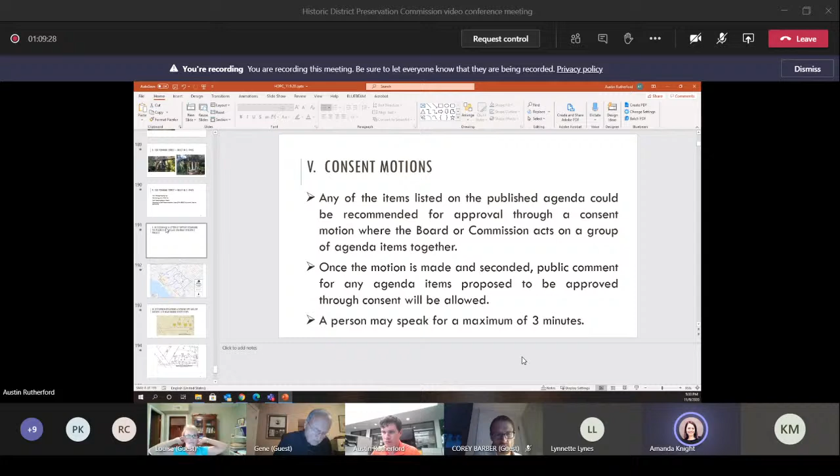Can you hear me? I just want to thank you for the opportunity to come to you and ask for a letter of support for a grant we are submitting through FEMA's non-disaster hazard mitigation program. There are two specific programs we're applying for for this particular project: the Flood Mitigation Assistance grant, and the Building Resilient Infrastructure and Communities grant.

These are applications to implement flood mitigation for Royal Avenue and Edwards Park Basin. As I'm sure you're familiar, that is a $12.8 million project for which we will be requesting up to a 75% match from FEMA. For the discussion with the Historic District Preservation Commission, I think this will be a very good indicator of us aligning goals in protecting and mitigating flooding for so many historic buildings in the Old Village. I have drafted a letter of support for the board and sent that over to Austin. If you have no questions, I'll end my brief.

Ms. Knight, I have a question. This is Louisa Montgomery. As I understand it, that is the Julian Weston Park, not the Edwards Park. It's not a particular park, it is the Edwards Park Basin. So those are two flood basins, Royal Avenue Basin and Edwards Park Basin. As I understand it, but the name of the park is Julian Weston Park, not Edwards.

All right, we're gonna go back to item 6. Item number 6A is 301 Center Street. Applicant seeking final approval for enclosing a portion of the front porch. Applicable ordinances are porch percentage, applicable design guidelines are doors and windows, number 3 and number 9.

Moving to staff comments, the enclosing of a portion of the front porch reduces the percentage from 17.5 to a still-conforming 14%. It should be noted that the neighbor property directly across the street had a similar enclosure about 2 years ago, also reducing their porch percentage to 14%. Staff recommendation is based on this and the design of a previous porch enclosure on the rear.

Staff recommendation notes the property across the street that includes a similar front porch enclosure. Here we go to the floor plan.

The applicant is ready. We are ready. David, you have 10 minutes. It shouldn't take that long.

I'm David McCall, architect, here with Paula Kessler. Paula wanted to do an addition to the house to increase the use and function of the kitchen with a butler's pantry. We stayed within the footprint of the existing structure. It is a non-historic building, built in 2009, and we stayed within the footprint. So we seek your approval. If you have any questions, I'd be happy to answer.

Are we ready for a motion of approval? We need to have public comment and the report first, and then the board can ask some questions if they so choose.

Is there any public comment? For those of you that may be tuning in on YouTube, if you call this number, I have available, and then the conference ID, you can ask questions. We'll give you a minute to call in.

I did just allow an anonymous caller in. I'm not sure if you wanted to speak on this item. If you are wanting to speak, just give your name and address, and you'll have 3 minutes. You may unmute yourself by hitting star 6. Yes, they have no comment, and there's no one else waiting in the lobby. Let's give another 15 seconds just to make sure.

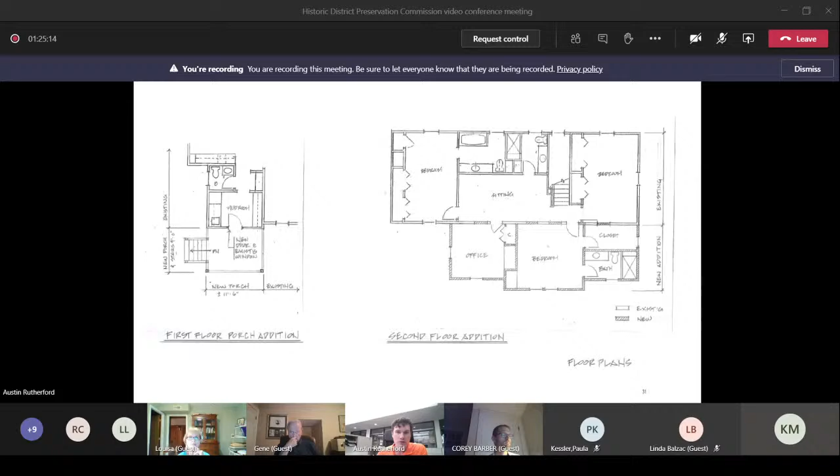Let me get to the site front stoop, so you'll see right here. That concludes the staff report. Linda, if you're ready, you can have your 10 minutes. Linda, you may need to take yourself off mute.

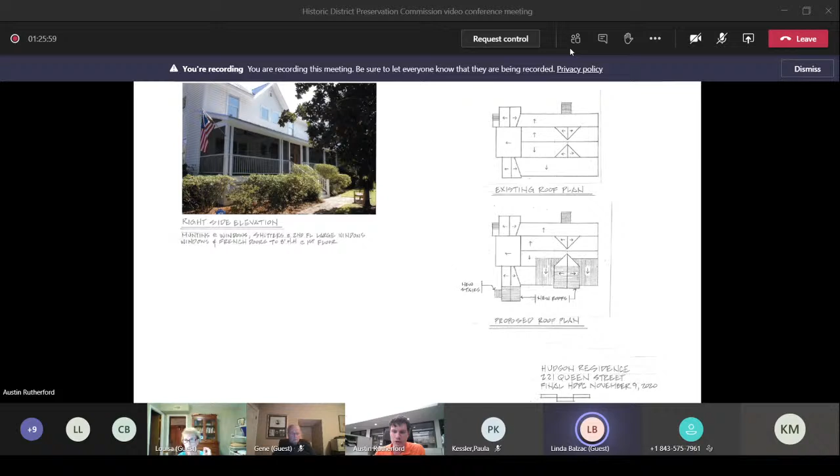Can you hear me now? Linda, we're getting some major feedback on yours. You want to try calling in, Linda? Let me bring up the code for you. Linda, you might want to try calling in, because we're getting some major feedback on your end. Give her a second.

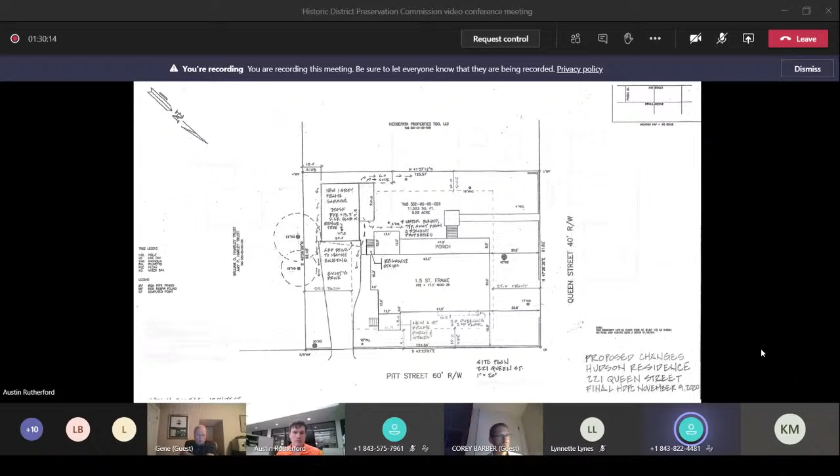If you have any questions... Just wanted to know, wait, I had to walk away from the computer. Here's the porch, and okay, I'm going to turn my mute button off for a second. No, I'm not, you just go ahead. Can you hear me? I don't want to wait for you. I can hear you, good.

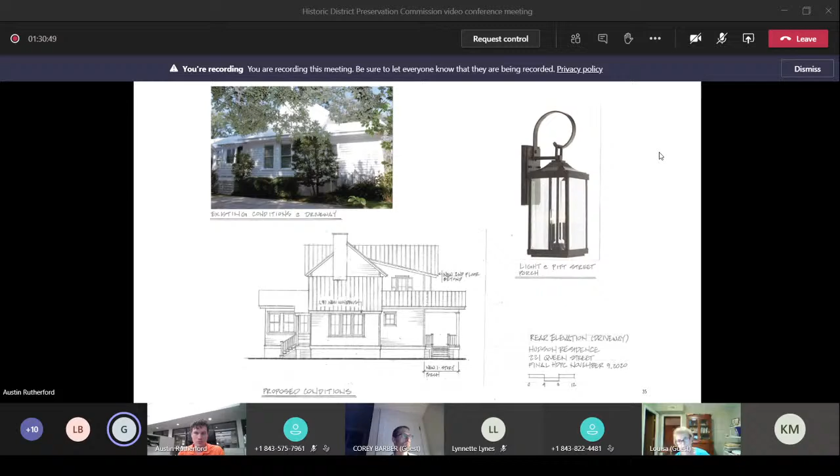Linda, this is Louisa. I think you've done an excellent job. The house needed some freshening up to bring it more into the flavor of the village. I'd be more than willing to give you that allowance, as it's not needed to do more than freshen it necessary. I think that is most necessary, and I'm definitely in favor of allowing that.

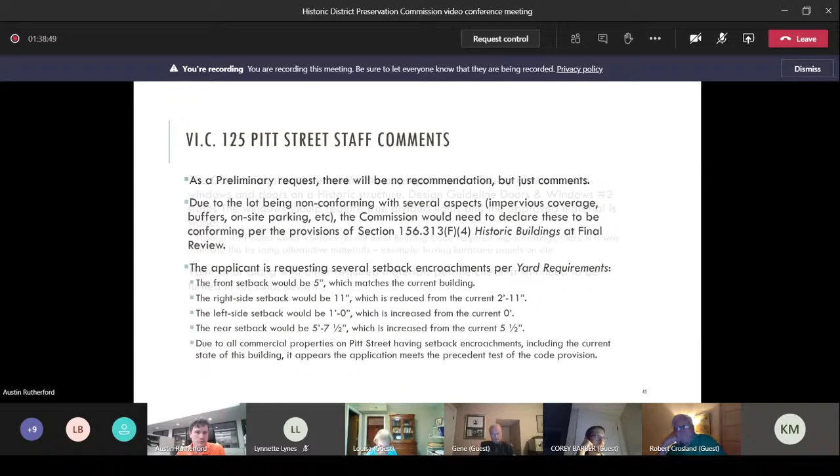The commission should determine the appropriateness of using aluminum clad windows and doors on a historic structure. The design guideline for doors and windows number 2 states windows should feature true divided lights, and the approved material is wood. Staff notes wood windows do not meet the building code requirements for impact ratings. There is a way around this using alternative materials in the building code - an example is having hurricane panels on site, sometimes just plywood on site, as you routinely see downtown. Paint color, along with other required materials per the checklist, will need to be turned in for final review, so just note that for the applicant. Again, there is no recommendation since we are in preliminary comment.

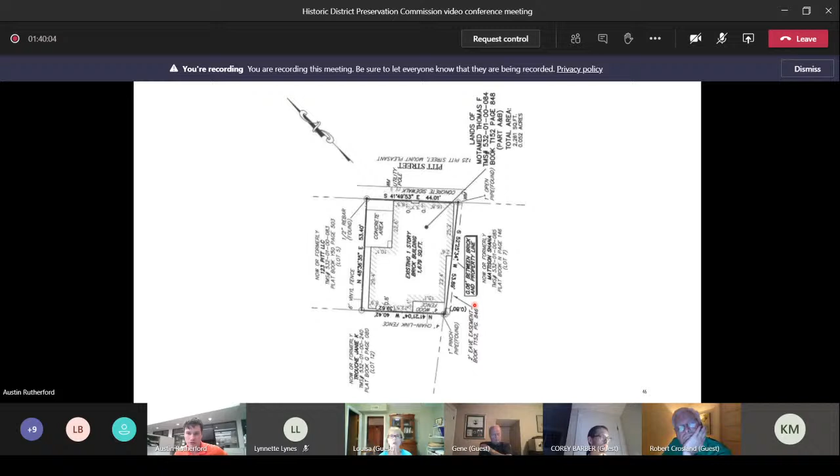Moving into the actual application, this is the survey of the site as it exists now. You'll note that if you step out the rear door, which it does have, you're actually on the neighbor's property in the rear. And the eaves go over on 2 sides, and maybe the third over here, actually go over the property line. That's just the way the additions were done back in the day.

Here you have the current site. This is the original structure, the original 1895 structure. And then these are sporadic additions that occurred at many different points over the years. Having been in this structure many times over the past couple years, as the owner was trying to figure out what to do, the additions especially are in very bad shape structurally and not structurally sound.

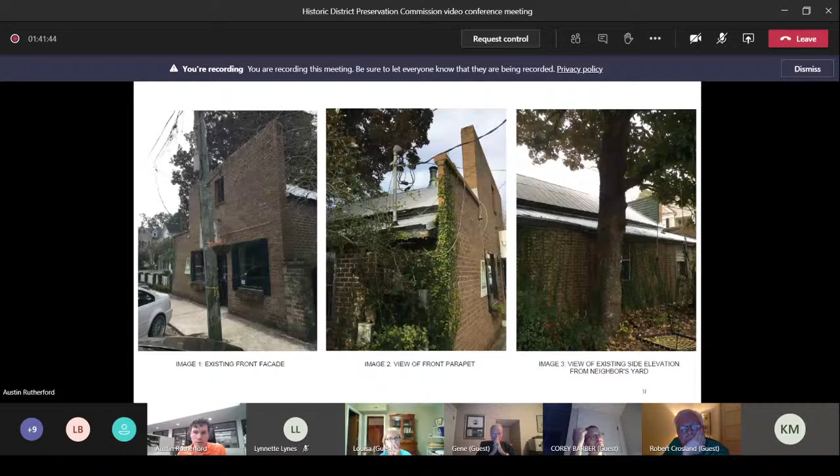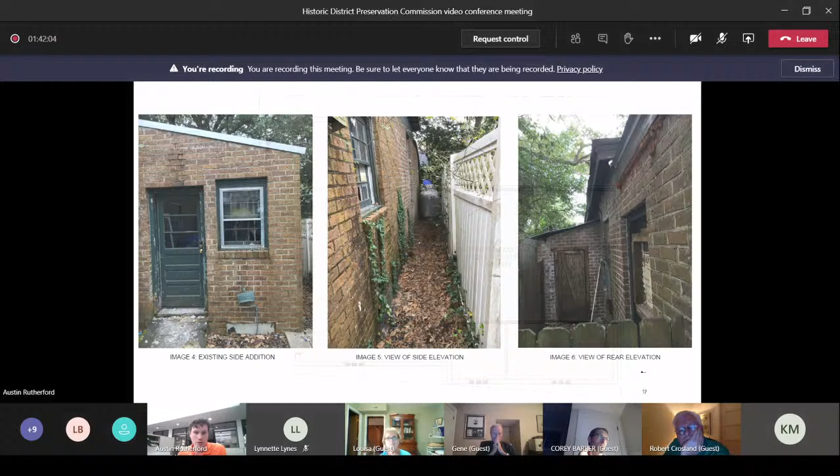These pictures really don't do justice, having been inside it. The original footprint is pretty good for the most part, especially the base flooring and some of the roof members. However, the more you get in towards the non-historic additions, it looks like they picked up pieces of wood off of other construction projects and tried to piece together stuff, like what was pretty common back in the day. So these are the non-historic additions in the rear.

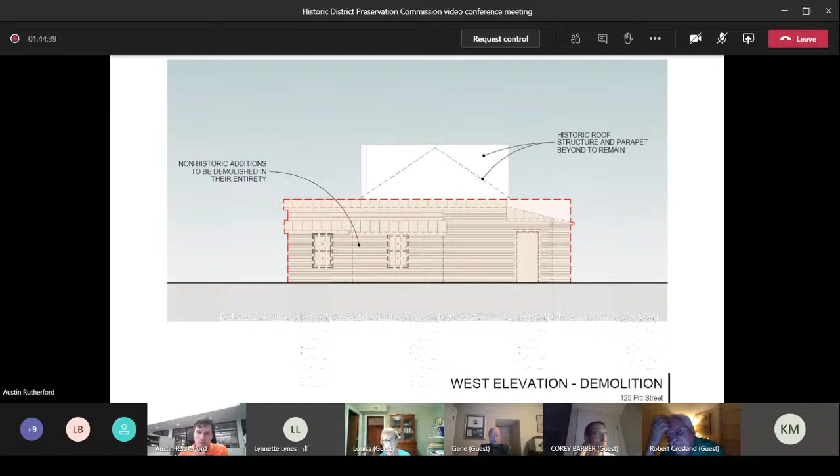So increasing the flood height is not required.

Excuse me. Just a second, sorry. We're having the cleaning crew come in, so let me just switch to the headphones.

Can you hear me? Yeah, okay. So moving to the next elevation, this from the south, and you can see what the south elevation would be here. And going into the 3D renderings.

And then to the artistic rendering. And that concludes the staff report.

If Chris, are you ready for your presentation? I'm here, yeah. You have 10 minutes. Okay, thank you. My name is Chris Altman, I'm with SMHA Architects. And, you stole all my thunder. If you could maybe go back to the new floor plan, I can explain a little bit of some of the questions that were being asked. That might be the easiest thing to do.

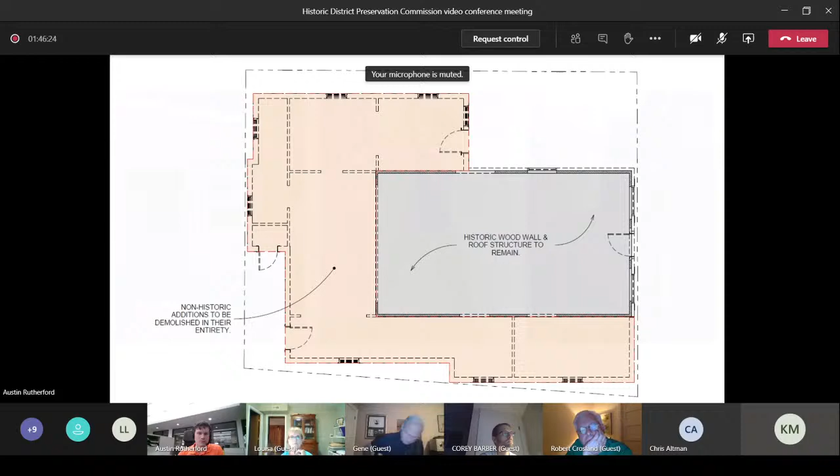Maybe one more to the... nope. Okay, outline. Keep going. That one's good, okay. Next one. Oh, sorry, okay. No, the other direction, sorry. Oh, okay, sorry.

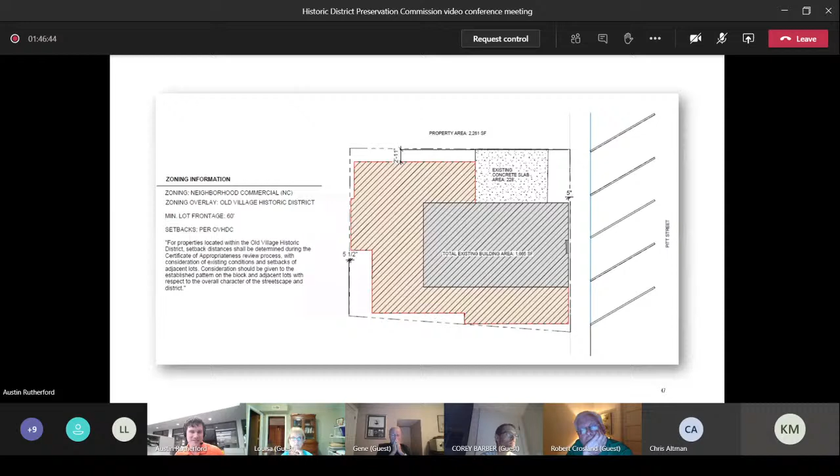There you go. As Austin was mentioning, we are proposing to move it, and as he mentioned, it's to get it off of that property line to the south, allowing us to provide some space for the geometry of the building, to correct some of those ad hoc and hodgepodge additions that were done over the years.

We're actually having to lift that existing center portion anyway because there is no real foundation under this building. It literally is 2x material sitting on dirt, and it's not something we could continue to do moving forward. So it provided us an opportunity to go ahead and correct that situation. It wasn't something we set out to do, but as we got into it further, we realized it would greatly improve the situation all around.

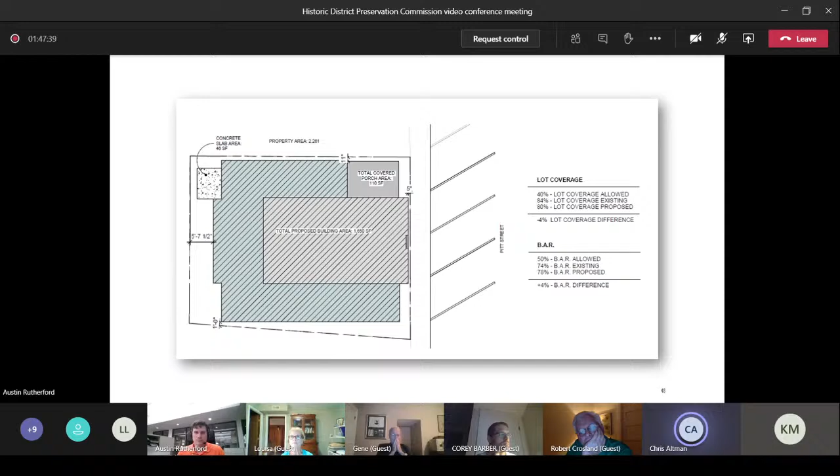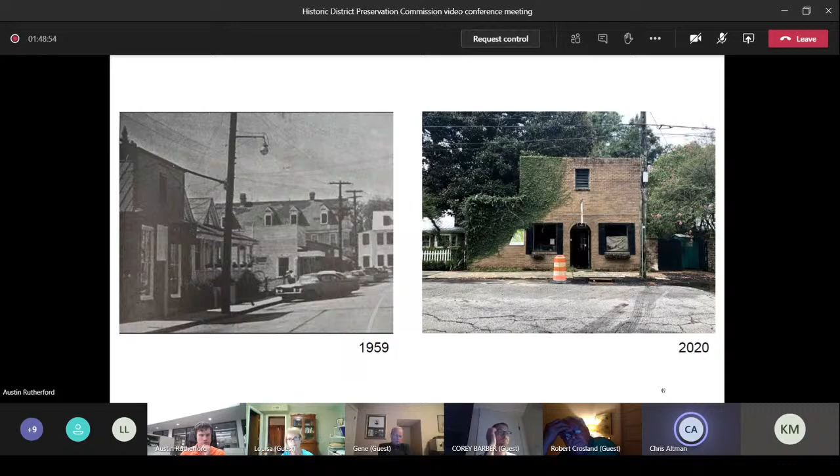Okay, Austin, if you want to shift to the elevations. You can stop there, that's good.

As Austin mentioned, we are proposing to use an aluminum clad window here. I would argue that if this was a residence, I would 100% support the idea of true divided light and wood windows, but this isn't a residence, this is a commercial building. Providing a more durable system - what we call a passive system - requiring nobody to put panels up or remove them, or have ugly fasteners on the buildings to accept them, we think this is a much better solution and would be more in keeping with the aesthetic of the neighborhood and the commercial area.

As you mentioned before, we're basically bringing this all back to what the 1959 image showed. If you want to go to the next picture.

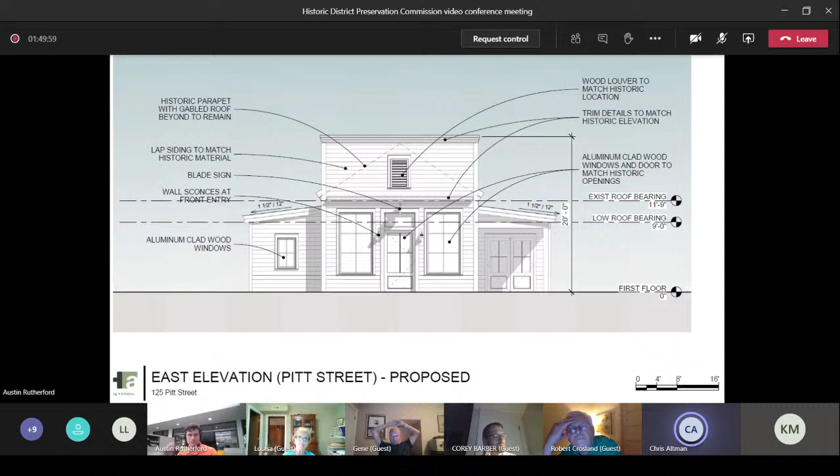That large window in the bottom left-hand corner underneath the covered area was original to the building, so we're maintaining that. What you're not seeing on these two side elevations is other windows, and that's because we're so close to the property line we can't provide windows for code. So that's really one of the main reasons we're proposing those shed dormers on the roof, just to allow some more light into that space, since we don't gain it from windows on the side.

We were really in support of the idea that staff came up with, that roof divider between the existing roof and the new roof, to always have a visual benchmark of where those two spaces stop and start. Next, Austin.

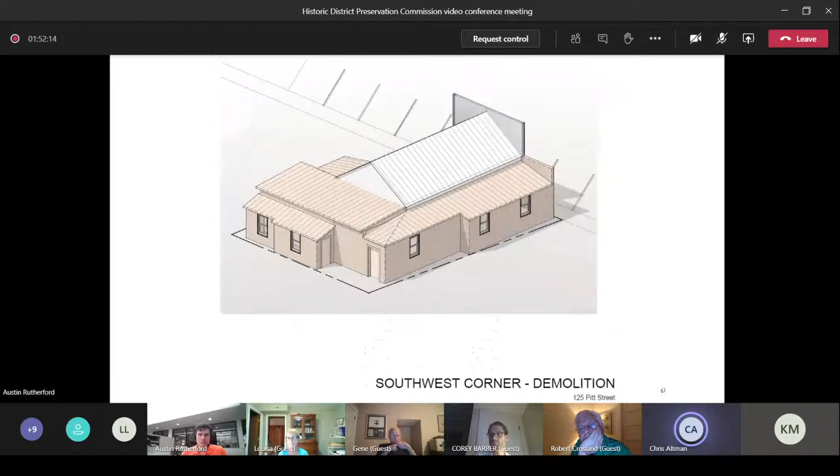That's good, Austin. Okay. It's beautiful. Thank you. We're trying.

I remember it before it was bricked up. It didn't look too good. I remember before it had brick on it, and it was a mess back then. I wish they had never put that brick on. It's literally against the siding, and it has contributed so much to the deterioration of this building. It's really a sad thing. It caused all the rot. Yeah, but we're going to fix it.

Good. Thank you. This rendering, we haven't finalized colors, but I think we're all leaning towards the sort of white, off-white that plays along with everything else that's in the old village, especially the commercial area.

I didn't mention earlier, but I'll mention now, and the color's a little off here, but we're actually proposing to do a zinc roof on this building, which is in keeping with copper or terne roofs. It's a 100-year roof, and I applaud the owner for wanting to do that so that for sure this building will last another 100 years. That's a classic, high quality roof to put on this building.

But back to the colors, again, whatever we choose and submit to you guys will of course come from the Charleston Historic Color collection that is required for the zoning ordinance, so we'll be sticking with that color group. And I'll open up any questions you might have.

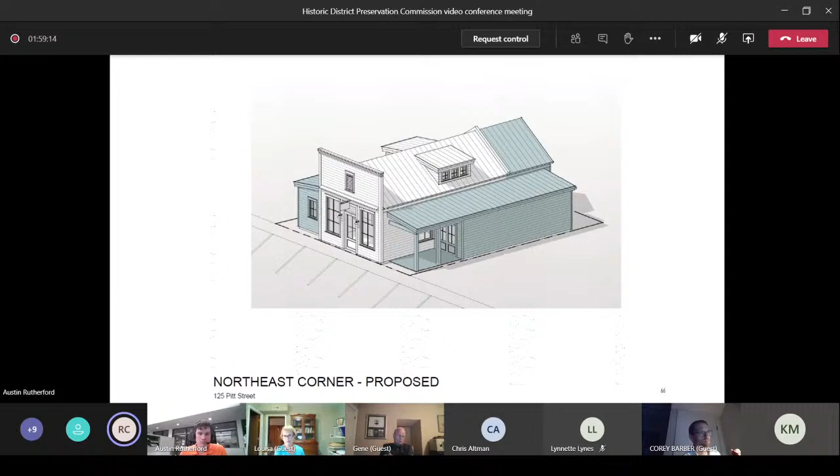We're not discussing design, are we? We're just discussing what are we working on particularly? You're providing comments to the applicant, which do involve design, so that they know what they should address for final review whenever they decide to come back.

Okay, well the siding in the original building, would that be 1 by 8s, 1 by 10s? I'm not sure you can exactly tell via that picture. Maybe, Chris, you can scale it correctly via that picture, get a best estimate. Once we get the brick off, I think there's some of the siding still there, so we should be able to measure that siding and basically replicate it on the historic section. That's what I was thinking. Yeah, underneath the brick, once we get the brick off.

Austin, can new brick be painted? Yes, new brick can be. So you could have a white painted brick that would clearly differentiate and not be so in your face different. But I don't know, side additions. And you're also going to have a maintenance issue with zero lot setbacks. I don't know how you're going to paint lap siding every few years.

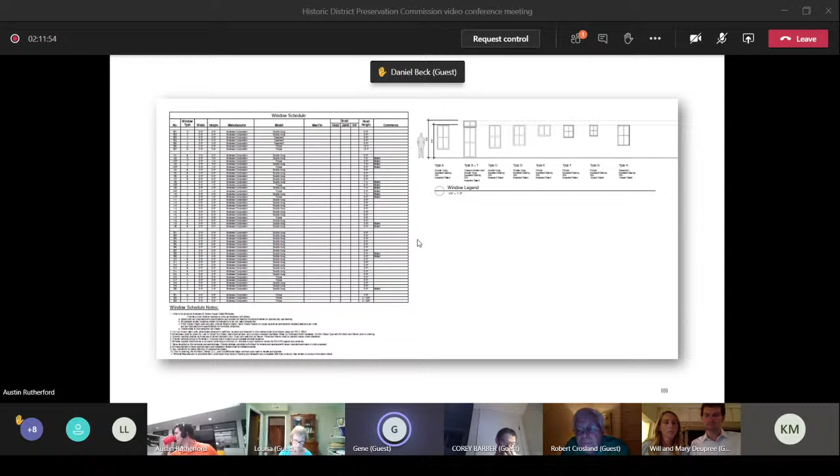Hey guys, am I unmuted now? Star 6. There we go, great. And I got my video. Sorry about that, I was having technical difficulties, so I'm calling in.

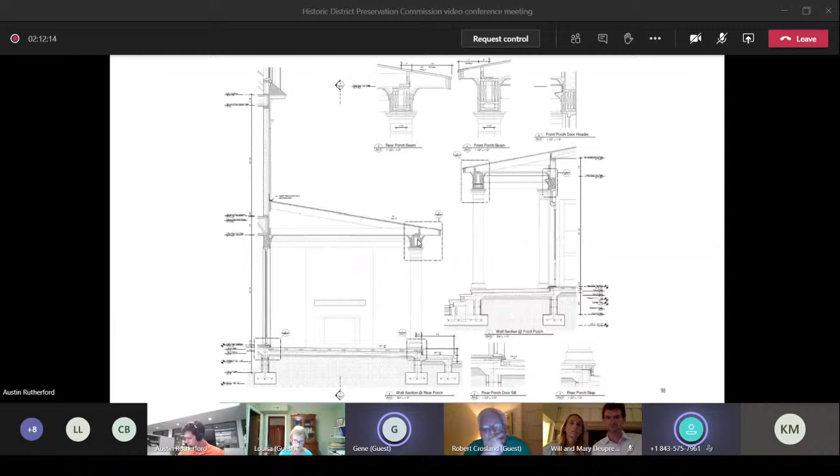So thank you guys for this, I'm here, the architects for Will and Mary Deupree, presenting on their behalf. Thank you for your time today to present these drawings for the proposed house at 744 Pitt Street. As Austin mentioned, we met a number of times to go over this proposed design - BAR, height, neighbors, adjacent neighbors, historic structure to the right. Really, our goal for this design was to fit in nicely, a new house that fits in nicely to the context of the old village - porches, shutters, traditional siding, traditional detailing - where our feeling is not every house needs to be loud, if that makes sense. We sort of wanted to just nestle in and feel like we've been here for a while, but also have some contemporary detailing, some things that are just a little bit fresher.

A quick note, we did get the lots recombined. They are officially platted since we submitted, and actually now it has been officially recorded with the town of Mount Pleasant. So we are officially one lot, which means we are officially back into a flood zone.

However, we are going to be moving out of a flood zone. So we decided to make the effort to design our house to the lower height restriction. We thought that was the proper thing to do in this context, given the neighborhood, and again trying to fit within the existing historic house to the right of us and then the shorter house to the left.

So overall, we tried, especially in Austin, if you pull up the site plan — we also had a lot of respect for the site, both in terms of context of the neighbors and also the trees that were on this lot. So as we developed this design, we took all of that into consideration and did our best to preserve and maintain as many trees as possible. We think those are a great amenity to this lot.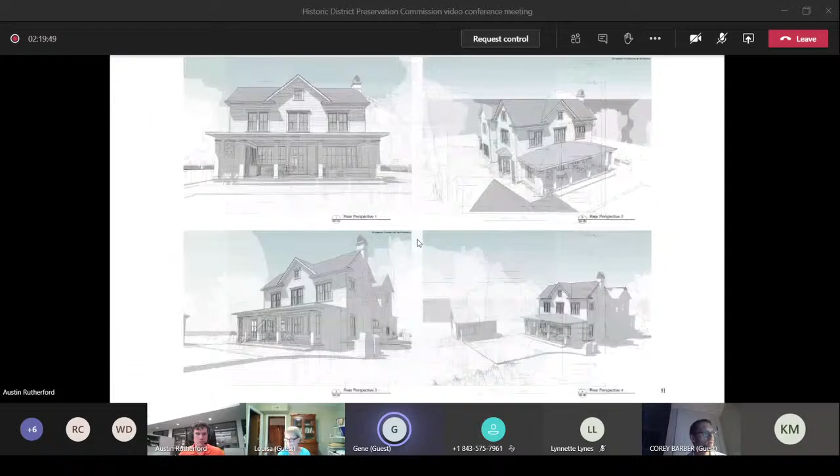What is the front porch square footage in terms of that 10% requirement? I know there's a rear porch, but no one sees that, so I was curious about the front porch percentage. I saw the HVAC was on the side of the house, and I thought HVAC was supposed to be in the rear. Also, why not push the garage back a little bit so you'd miss that one tree you're taking out? And I didn't see any elevations from the street that showed the neighboring houses - we've seen that on other new construction submissions, and it's very helpful to see the relationship to the neighboring houses. The only thing I saw in the submittal was just this house, 3D or elevation otherwise.

So from staff's perspective, for the HVAC, it's on the rear or an inconspicuous side, meaning it can't be readily seen from the right of way. With it being tucked in this corner, that wasn't a concern with this indention from staff at least. So I agree.

Daniel, you may want to address anything. Yeah, so in terms of the porches, the front porch is about a 200 square foot porch, and the rear porch is about a 500 square foot porch roughly. Our front porch is - the length of it, I'm going to put an actual dimension on it - it's about almost 30 feet, 28 feet long across the front there. So I feel like it's an appropriately proportioned front porch.

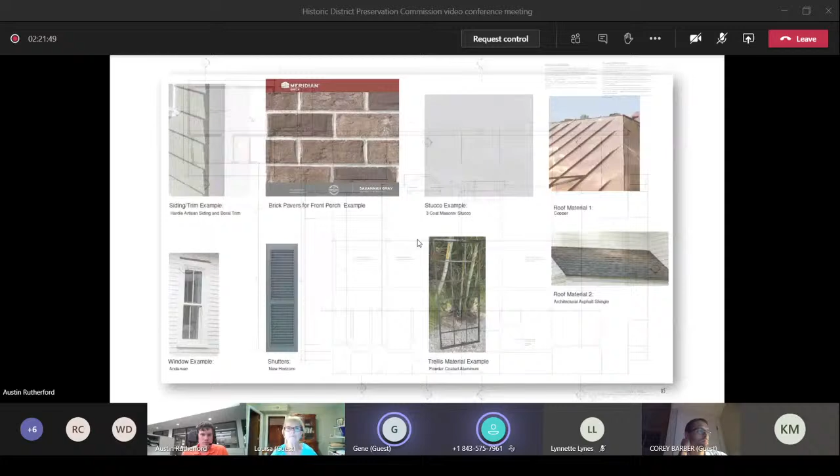In terms of the elevations, I certainly understand that sometimes that's helpful in this context, since it wasn't a hard necessity or requirement in the context of the neighbors and things. We honestly spent most of our time focusing on the design of the house. We understand the height of the houses next to us, and felt like since we are centered in the lot and below the height restriction, and our front porch closest to the street was a one-story structure essentially with a room above it, that was sort of non-material to the overall review process. Again, we focused mainly on the design, but I certainly understand what you're saying.

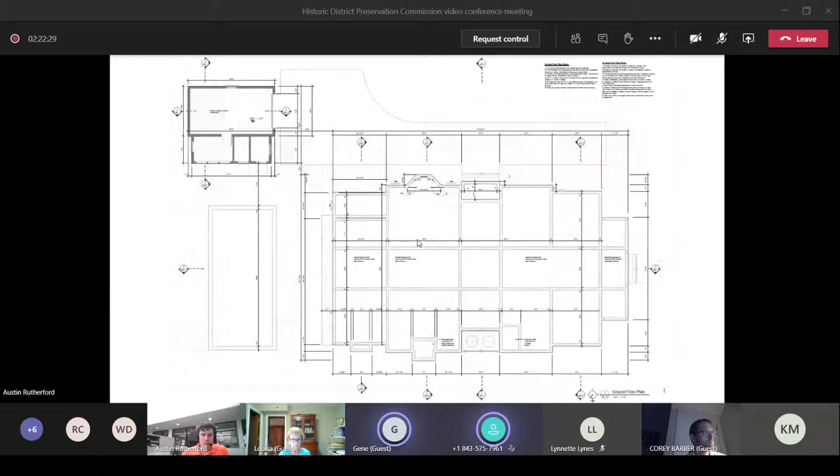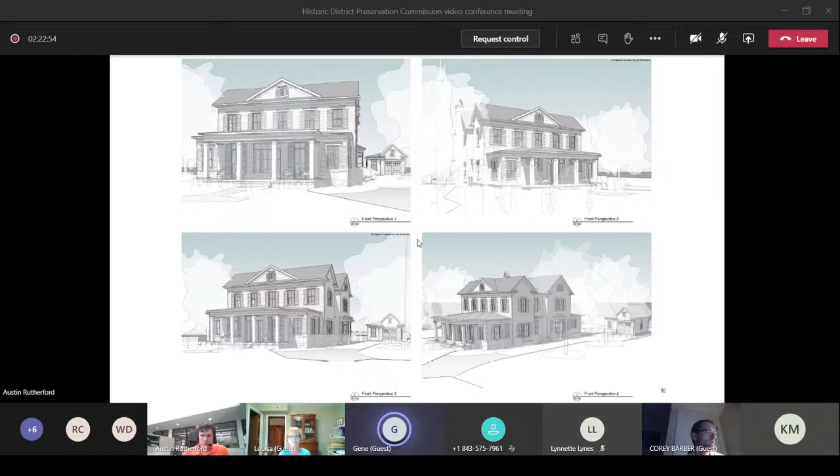In historic settings of downtown Charleston, where we're in close proximity to adjacent neighbors and things are immediately next to each other, I could see where that would be helpful. In this case, since we're centered, we didn't seem to be pushing one way or the other very hard. I see that you guys are centered, but I don't know how your neighbors are on their lots. I feel like the big house is further from you than the smaller house to the left, but I have no idea without an elevation.

The site plan that we got, the surveys from both of our neighbors, shows their footprints. If we go back to that, thank you. Yeah, I see that you're aligned front to back, but I think you understand my concern.

So what's the setback relative to the existing structure? The setback in terms of the actual footprint from the main front body of the house is similar. You can see where the front is, and our porch is maybe just a little bit past that. It's basically in the same area they were situated in, a very similar condition, so our porch steps out basically from where the existing front of the house would be. Okay, this is a good slide.

You can see that tree you're Xing out. It seems like you could save that one. That's a hickory, but the town of Mount Pleasant doesn't protect it.

We've discussed this with our neighbor. We also have this nice green patch along the back that we'd like to leave as a buffer between our rear neighbor, especially since we've talked extensively to our neighbor to the right. We'd like to leave that as a lawn space, especially for the children to run around. And sorry, that's a holly, not a hickory, I'm misspeaking—the H's there are hollies.

So I see in this plan the dimensions of the neighbors' houses from the property line, but where are the dimensions of your house from the property line? I see the 7.7 for the big house and the 20.6 for the small house. You can see the setbacks there, the 25 feet. I can give those to you, but we're well within all of the setbacks. So my apologies—my worry is that you're overwhelming the smaller house on the left because the house is pushed that way, and this house is basically as tall as the house to the right.

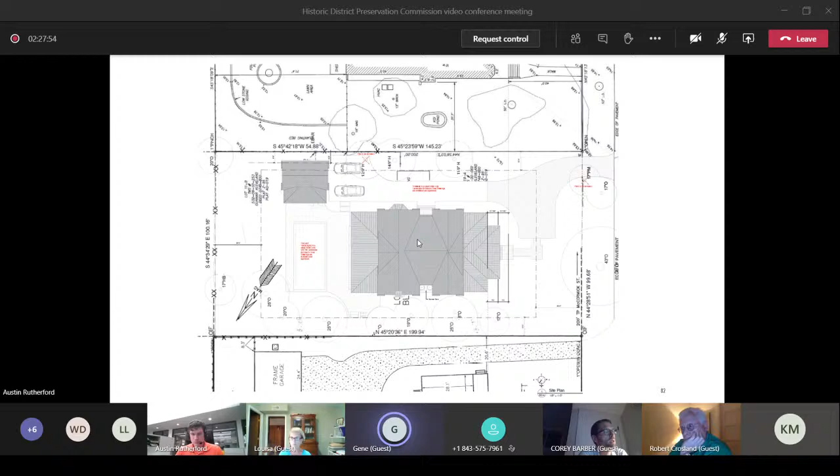Okay, are we gonna beat this horse to death?

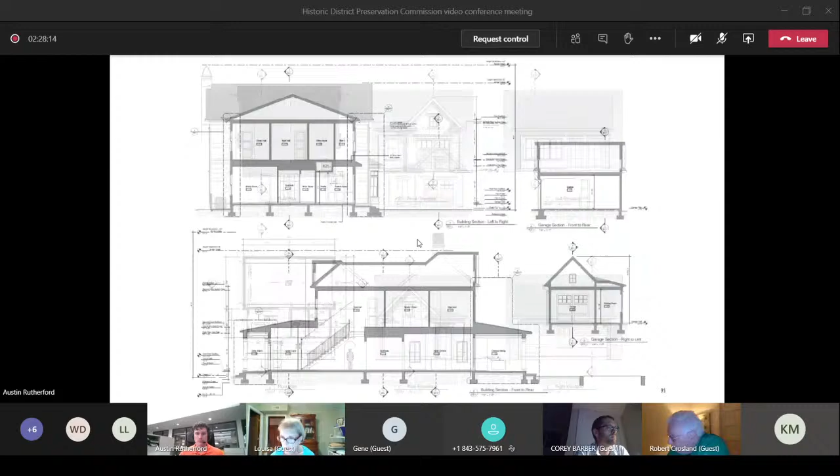Were there questions from the other board members? Are we ready for a motion? We're still in question. Are there any more questions from board members? I mean, would the designer be amenable to providing that elevation or not?

If the board votes that is necessary to approve this design, even though it won't change necessarily the look of the design, I'm happy to produce it. I feel like our professional judgment, we spent some time on this and a lot of time in the design and back and forth with the staff. So certainly if requested, we can absolutely produce that drawing.

Yeah, we never saw this in a preliminary setting either. So this is our first time seeing it, and you're taking out a house that's there. So I just feel like we got to be careful.

How tall is the house that is going to be demolished? What is the roof height of that one? 20, 25? No, the roof height on that, because on the back you get that, it's the real elevation. You're probably closer to the 30, 35 mark of what this house is going back at in terms of the allowable height restriction. This is on the house that's going to be demolished, because the rear of it gets much taller on that.

Yeah, right. Well, Austin, I'm just considering like a motion where we're going to see all this. You said there's another submittal about hard landscape and I don't know what else. Can we just wait till we're looking at that and see the elevation before we commit to something?

If Ryan, are you available for the applicant? Yes, sir, I'm here. Can you guys hear me? Yes, we hear you. You have 10 minutes. Sounds good. My name is Ryan Smith, I'm with Beau Clowney Architects. Thank you all for your time this evening.

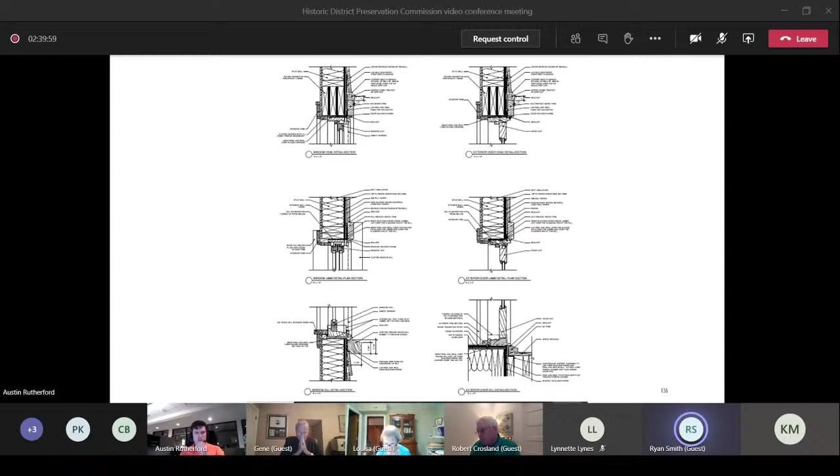As Austin mentioned, we came before the board on August 12th of 2019 with some modifications, mostly to the exterior of a 1993 portion of 747.

Really what we're trying to do, Austin, if you wouldn't mind going to the rear, I think that'll probably tell the story best. So really what we're trying to do, it's kind of a redistribution of some windows up top.

We are keeping with the previously approved notion that we are trying to differentiate the window style, the 6/1, and the louvered shutters from the historic portion, to continue to tell the evolution of the building. As you see between those two slides, getting rid of the four windows altogether in the old elevation allowed us to add the shutters on the back, which I think ties the two sides together really well.

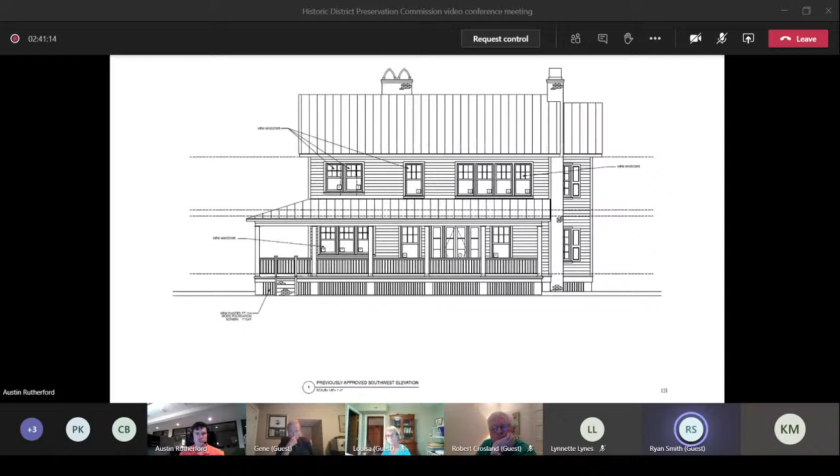And the new stair in the middle, we're kind of working to match the stair that was there previously, which really wasn't like a lot of the ones you see in the village. It was kind of this wood-brick hybrid. So the one you see on center here is really all wood, and that's keeping with ones you see traditionally, especially in the rear of a home like this, leading out to the garden.

And Austin, if you wouldn't mind scrolling to the front, I'll talk about the pool. It's kind of it for the house. The landscape plan, please, I think that tells it. Yeah, I think it's the third sheet. This one, or do you want the colored, rendered one, please. All right, perfect, thank you.

So this is the pool. We're working with Glenn Gardner on the pool location, hardscape, and planting together. We really came up with a strategy because of how close we were to the impervious surface, and we totally understand that a post-build survey will be required, as well as doing everything we can to keep those pool lines out of that tree protection zone.

The pool location is really located because of the tree. What you see in that circle is the perceived drip line, which Austin can attest is quite large in comparison to the root system itself. On our site plan you will see two circles, the smaller of which is actually the tree protection zone. So we wanted to keep the pool not only out of the tree protection zone, as we have to, but keep it out of the drip line as well.

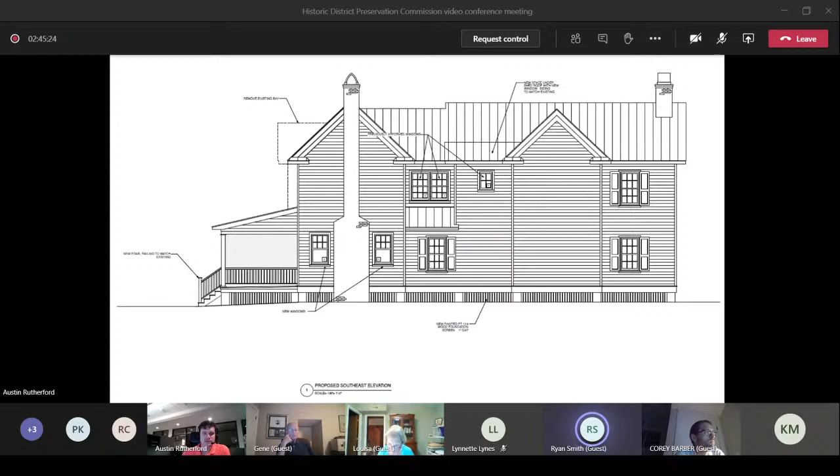You will see on both the site plan and the rendered landscape plan that there's intended to be a small hardscape sitting area, and it was really about noise proximity to keep all of the equipment away from the house. The HVAC units you see are hidden by that portion of the house that kind of juts to the plan south. It would obviously have a screen on the equipment, but again, it was really from a sound point of view why we chose that location.

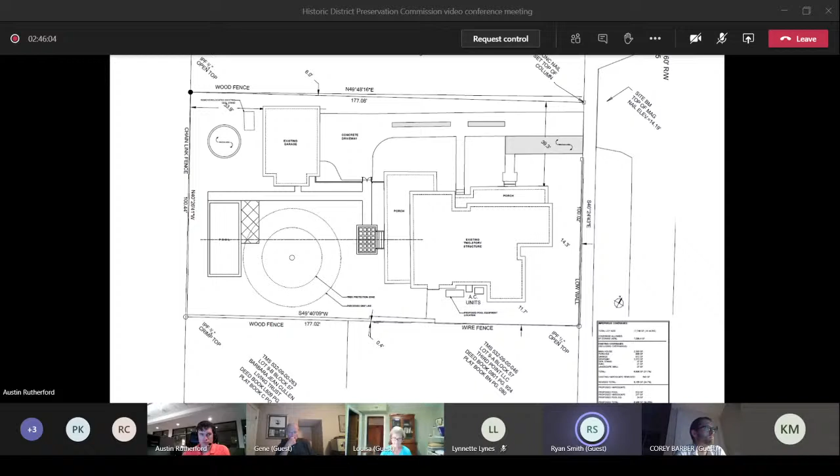The current generator and generator stand, the generator actually doesn't work, and you'll see that note is to remove it. So we were actually intending to get rid of that, just so that would all become landscape basically. So the real equipment yard would be where the HVAC units are currently.

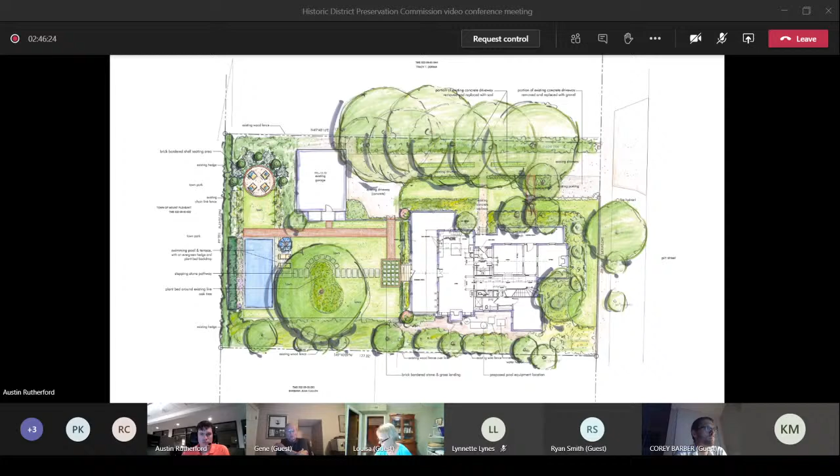I would mention, at least in terms of the tree, there's no issue in terms of where the equipment is located. It just means they'll have to run a longer line to get around the tree. It's not anything other people haven't had to do with pools and other equipment lines, power lines, etc. I was just offering it as a suggestion, not sure if they looked at it, but it's up to them.

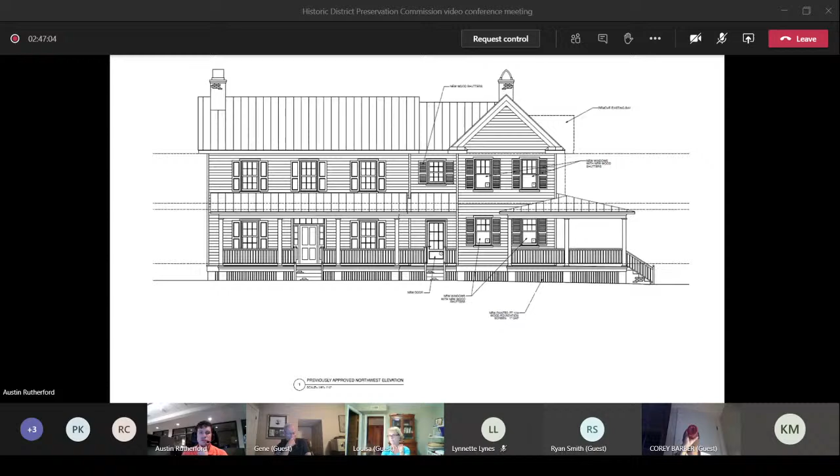Staff doesn't have any other further information. We did explore putting the equipment over there, but because of the items mentioned before, we vetted everything and chose this location. So it was considered.

Ms. Montgomery, if you could close public comment on the 747 Pitt Street application for renovations and pool.

Are there any other comments, or can anyone make a motion? I'll move to approve with the condition of a post-build survey to confirm conformity to the impervious lot coverage maximum for 747 Pitt. I'll second. Any more discussion?

All in favor, aye. Nays? Hearing none, it's unanimous.

These are the staff approvals that staff did along the way, for this past month.

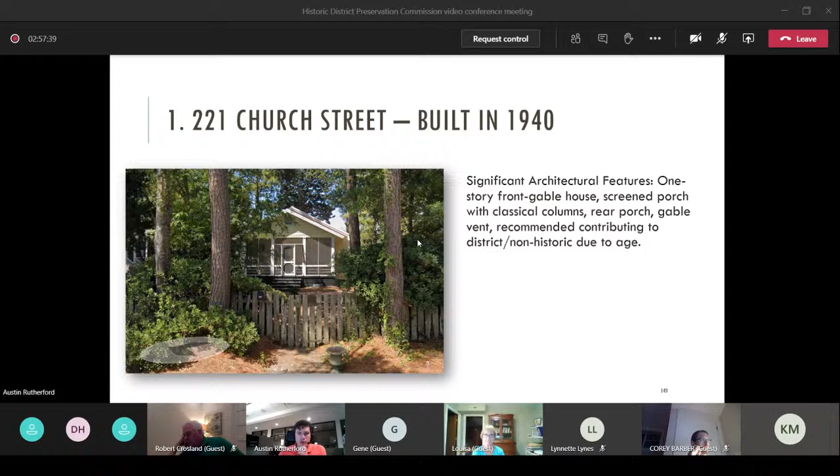221 Church Street, which was built in 1940. Staff's recommendation is historic. I did go by, spoke with the property resident, and was able to get some pictures. Note the home features true divided light windows with wavy glass, with storm windows over, and real wood siding on the original portion. This back portion, I'm not sure if it's real wood or the composite stuff they make nowadays, but the original portion is real wood.

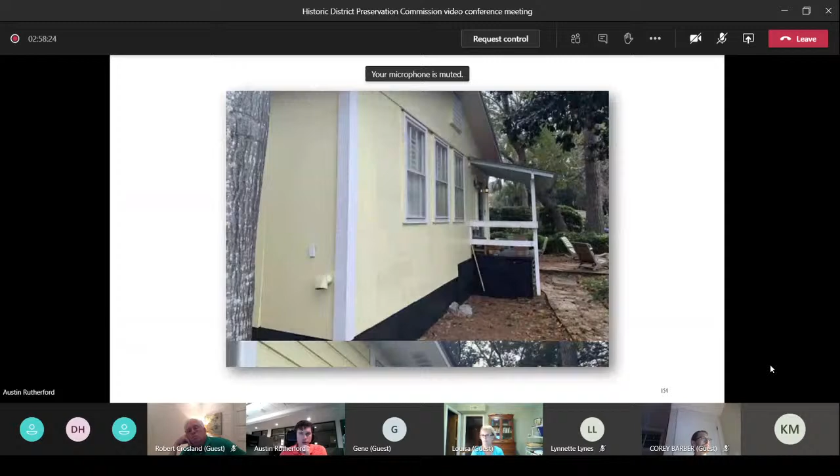So I'll go back to the recommendation. This was one that was a split vote, and you asked for deferral last time, wanting some more information on it. So I hope you're good on that.

Thank you, Austin. You may remember from the last meeting, I said this was a small cottage of a workman, possibly a shrimper, someone who worked the waterfront. It is what is left from what used to be several, and it is most definitely contributing to the flavor of the village.

And I do recommend to you gentlemen that we declare it historic. Is that a motion? I will move that we declare 221 Church Street, built in 1940, historic, based on all the criteria, 156.432B1E, as contributing. Is there a second?

I would second that. Okay, all right, we have discussion. Do we have any discussion on this particular cottage? Did Robert want to say something? Mr. Crossland, did you have any comment? Oh yes, I actually tried to second it.

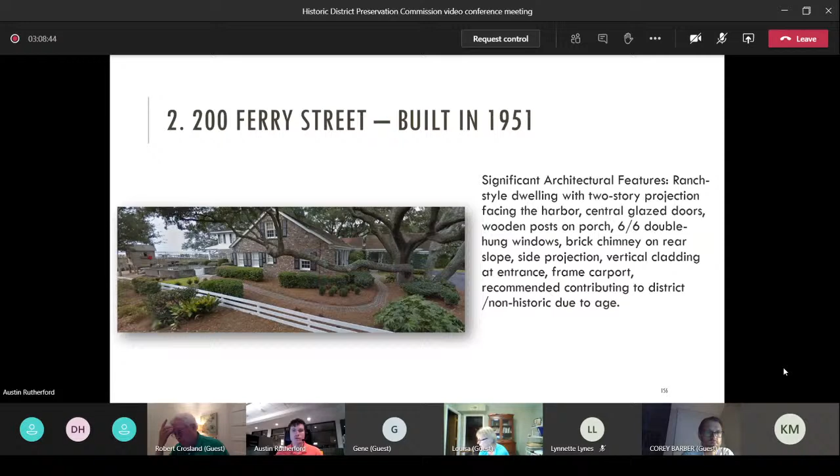I agree. It had casement roll-out windows - you remember those metal windows at one time - and there was a carport, a flat front. It has been drastically altered. It does look better, and maybe if somebody didn't know they would think, 'oh golly, there's a historic house,' but it is not a historic house.

All in favor, say aye. Aye. Nays? Hearing no nays, it unanimously passed to deny historic designation.

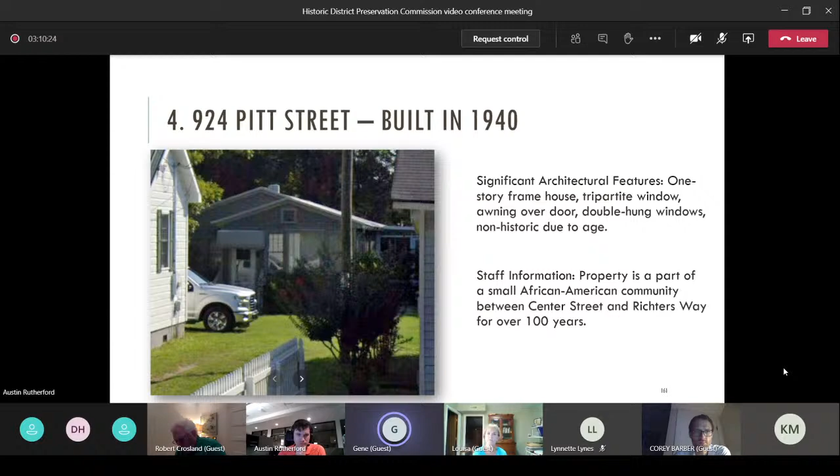Moving to 924, also known in some circles as 928 Pitt Street. Significant architectural features - staff information again: the property is part of a small African-American community between Center Street and Richter's Way for over the past 100 years. This was built approximately in 1940.

From our records, staff's recommendation is for D, E, and K - K being reflective of that African-American settlement community that's down there.

I was able to get some pictures of this home more closely for you. It does feature real wood siding with true divided light windows, which would have been appropriate for that time frame.

The covered porch addition was done, I believe, after Hugo at some point. Just noting, from our recently passed comprehensive plan regarding settlement communities - it says to protect the integrity of the settlement communities by limiting further encroachment and deterioration of the original development patterns, and ensuring any redevelopment is compatible with community standards. I just wanted to make that known.

So if there's any questions or discussion or a motion - Austin, there's windows in the front that have the 3 lights on top. Are those also wood and real divided lights? I believe the center picture window was added later, and the ones adjacent appeared to be real divided light, but the picture window was added in between them at some point.

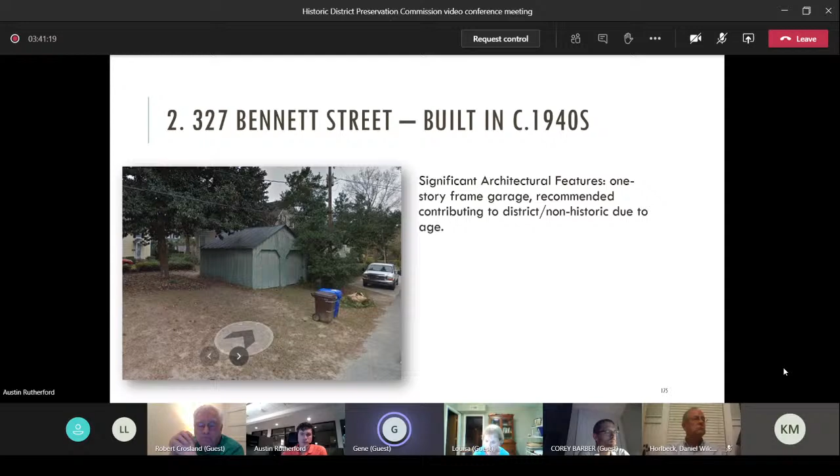We need to have—do we have a motion saying it is not historic? Correct. Well, let's have a motion then. You don't necessarily need a motion unless someone wants to make a motion to that effect. That's different, Louisa. There's three options here: recommending not historic, recommending historic, or doing nothing. Okay, well, let's do nothing. Me and Robert were saying we just leave it as is, do nothing.

But I would just say this: if you do not feel like it needs to be classified historic, then there should be a motion to recommend it not be historic. That's what I said—it's better to make the motion to clearly state what you want to happen to that property, as opposed to leaving it up to town council. Yes, I'll make that motion. I will make that motion that at this point, it not be recommended for historic designation. I second.

Any more discussion? Let's have a vote. All in favor of declaring it not historic? Aye. How many ayes have we got? Any nays? All right, unanimously decided not to make 327 Bennett historic. All righty.

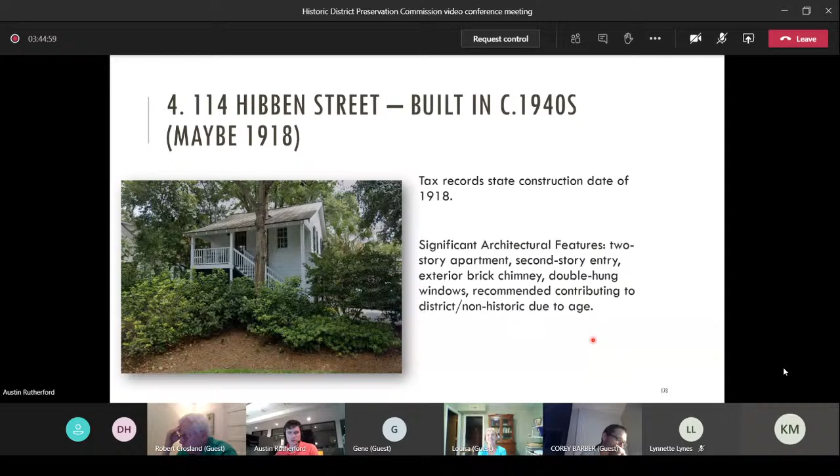114 Hibben Street—let's see here. That's what we just did. Yeah, that we just did. Sorry, I'm getting ahead of myself. There was another 114 Hibben Street—that was the issue.

125 Live Oak Drive—I went out and got this picture myself. Austin, just for clarification, so the second 114 Hibben was removed? Yes. Okay, thank you. Yes. So moving on to...

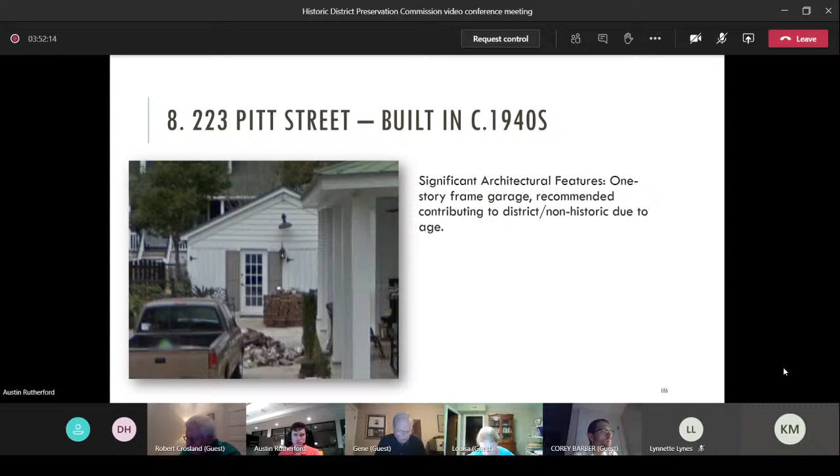Any discussion or motion? I move that it be declared historic, as it is contributing to the district. Okay, I'll second it. Is there any discussion on this one? Do we know when it was altered, Austin? Within the past, about 5 years ago, I think, I've looked at the COA. Right, they basically took out half of the bay, took out the one half door and put in a normal doorway so they could finish on the inside, but they left the half bay and the full bay intact.

The lady who lives there has a decorating business, so I'm sure she uses part of that as a business. In this one, because it hasn't been modified to an extent, we still feel that it's got the historic character. You could still call it a garage now.

Did you want to call for the vote? Is there a motion on the floor? Yes, it was a motion to approve and a second was already done. Good, all right, if there's no discussion, I'll call for the vote. All in favor of declaring 223 Pitt Street as historic, say aye. Aye, aye. Any nays? Nay. Was that one nay? Yes. Motion carried on that? 3-1. Yes, motion passed 3-1.

Very good. The last one, sorry, jumped ahead, is 120 Venning Street, built circa 1940s. I spoke to the owner and was able to go on site, so these pictures are mine. Built circa 1940s again, recommended for historic as it was contributing, under item E.

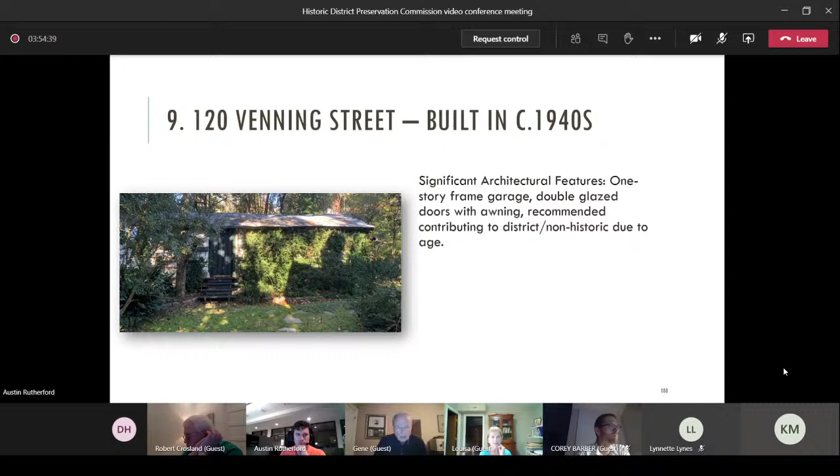Yes. Wow, it's a very Gothic looking home. It's most unusual, we do not have another one like it. It's got very interesting architecture, very Gothic, with wood siding the entire house. Lots of trees and bushes.

Now, is this for an outbuilding or for the entire home? This is just for the outbuilding. And do they feel the outbuilding is original? Is the house already declared historic? Yes, the house is already historic. It's 18 something, I think.

Is there a motion or discussion? Further discussion? There's a motion, we can move on to the next item. Let's move on to the next item. Or you can also declare it non-historic if you'd like.

I move that we declare 120 Venning Street non-historic. Is there a second? Second. Is there any discussion? All in favor of declaring 120 Venning Street as non-historic, please say aye. Aye. Aye. Any nays? 120 Venning Street, not historic.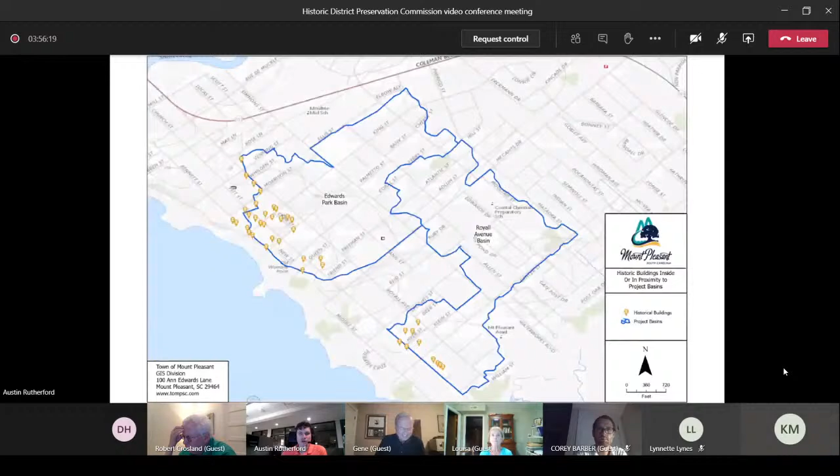All right, so the next item. We already did that. Item number 11 was what Ms. Montgomery asked for at the next meeting. If Ms. Montgomery, you want to talk about what you want to go through, and I can show some stuff as well. I have extensive information.

Dr. Nick Butler at the Charleston County Public Library wrote a treatise on the rise and decline of the Cooper River ferry companies. As late as 1930, a sea captain had the rights for a ferry from the foot of Hibben Street. There were also other ferries that came and went—there was the Hog Island ferry, the Hibben Ferry, and one on Ferry Street.

But this was the most recent, and this was the one the trolley cars were involved in. I'm proposing a viewing area that will traverse the end of Hibben Street with a platform similar to the Shem Creek Memorial Boardwalk over Shem Creek Bridge, with storyboards about the trolleys, pictures of the trolleys, and a couple of pictures of the Sappho and the Lawrence, the old steam-powered ferry boats.

So is this something that, if the town were to want to build this in the future, this commission would work with the historic commission on the information boards? We could have an architect engineer draw a plan for a platform that extends over this very steep drop down to the marsh and trash at the end of Hibben.

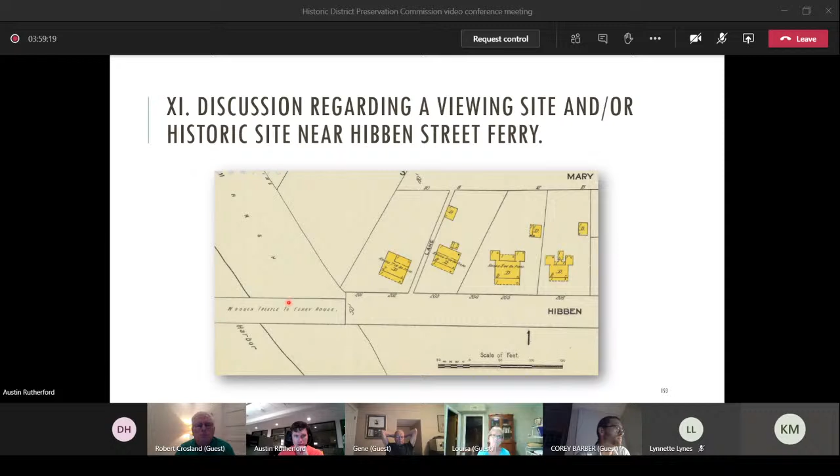No, it's just—yeah, and I wanted to go through this. These are some of the... this is the 1912 Sanborn map right here, so you can see where the wooden trestle went out, and then again in the 1924 map. So because no really good pictures that I could find really exist of this dock...

I got our GIS department to maybe supply a little help on this relief map based on LiDAR data. So what you can kind of see is that typically where there would have been a dock or a trestle, at least some dirt or mud either collected or was poured out near it, so that there looks to have been a pier where the dock went out, and then maybe a second spot where one boat laid up here, another boat laid up there. So you can kind of see where it was—that's the benefit of this data for you.

Thank you, Austin. Also, let me say that in 1930, the town of Mount Pleasant purchased the Hibben Street dock from the State Ferry Authority for $51, buying all the property from the southwest corner of Hibben Street to the channel of Charleston Harbor, the whole way up. So, any other discussion?

I'm sorry, I'm going to interrupt just a minute. I think it would be appropriate to ask to maybe partner or include the historical commission in with a letter of support. Coming from both commissions, that might give a little stronger recommendation to the town administrator. Very good, let's do that.

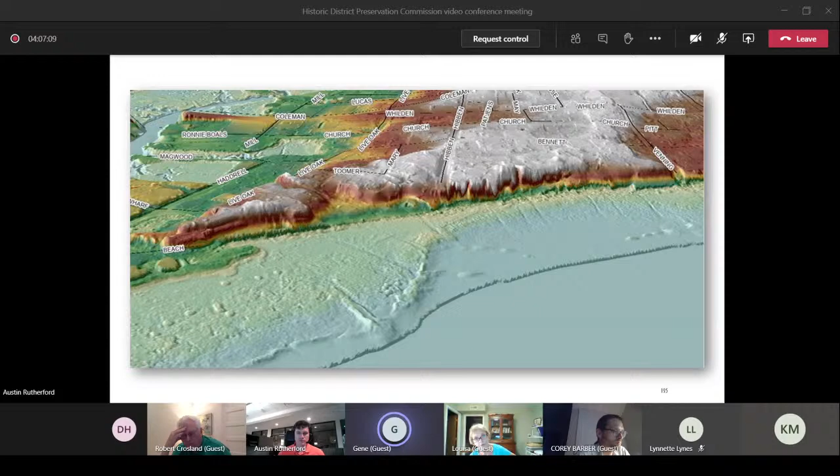Let's do it that way. Okay, so Mr. Crosland added for discussion regarding the design guidelines for paint. Here are the current guidelines, and the chart is widely available as well. Mr. Crosland, if you wanted to open the discussion.

Yeah, I mean, we approved this paint guideline thing here. But the issue is that they commingle all of the interior and exterior colors. So basically every color is approved. I don't know what to do about that.

I was kind of surprised when I actually got the color chart, and I said, gee, it's like they don't discriminate between exterior colors and parlor colors - the things that you would paint your dining room or your sitting room in the 1800s. I don't know what to do about it, but when that house over next to Alhambra was painted that orange color, I took my color chart out and I went, oh yeah, that's on there.

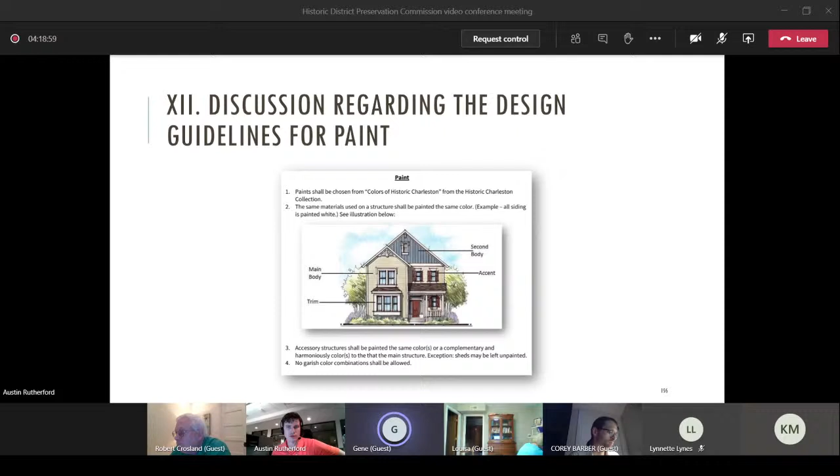Hearing. All right, so I'm not sure if all of you are fully aware, and this is up for discussion: the town is considering going to flood plus 2 feet for the minimum for a raised home in a flood zone. That would kind of undo what you have for your design guidelines. So I wanted to come before you to see if you wanted to raise this to flood plus 3, or put in more general information that you will go no more than 1 foot above whatever the town flood zone or building code says, so we don't have to revisit this every time the town council changes the flood height.

For instance, if they go to flood plus 2 tomorrow and then five years from now they go back to flood plus 1, or they could go up to flood plus 3, we don't have to revisit this design guideline every single time.

No, I think that we should go to flood plus 3. But there's also a maximum height issue. Yes, and that'll always be the fact.

However, town council hasn't given the final reading to flood plus 2. That'll happen tomorrow night. They already had first reading, but minds can change, of course. So we would just come back to this with some rewording, probably in January, when you already have to update or give your yearly approval to your design guidelines.

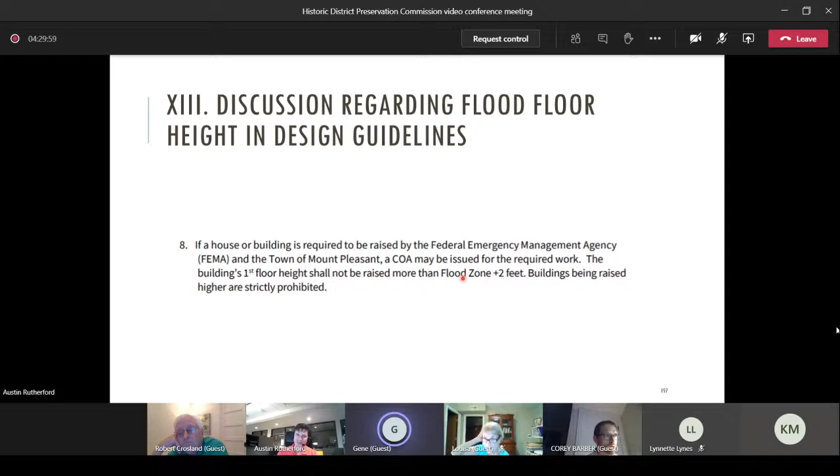Any items for next agenda? No. I thought Louisa was kind of alluding to the fact that there might be certain things that are right near the district.

Like St. Andrews has the loop around it, and there's the other church, there's the sweet shop. I don't know if we want to, since it's in our power, start discussing that.

That's a whole process that takes a lot longer than just that, because we have to get a survey done, then it has to go through town council, then recommendations, yada yada yada. And that also takes money for the surveys and for any recommendations from a qualified historical surveyor or whatever word I'm looking for. So that's where that falls under the intent of our commission.

I'd suggest let's wait a while, especially since this would have to be a budget item, and as you can imagine, budgets are a little tight right now.

When does the town do their yearly budget? Lynnette, that's your wheelhouse. It typically gets kicked off around the end of December, beginning of January. So if you wanted to look at a project, I'd recommend starting or getting a good handle on it in December, but definitely not waiting much farther past January.